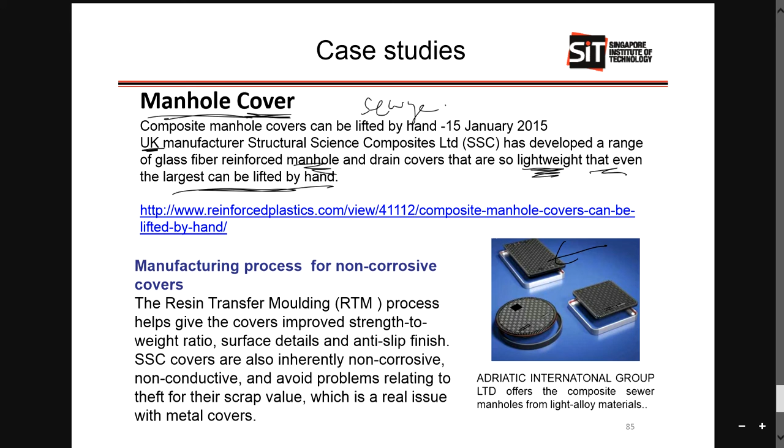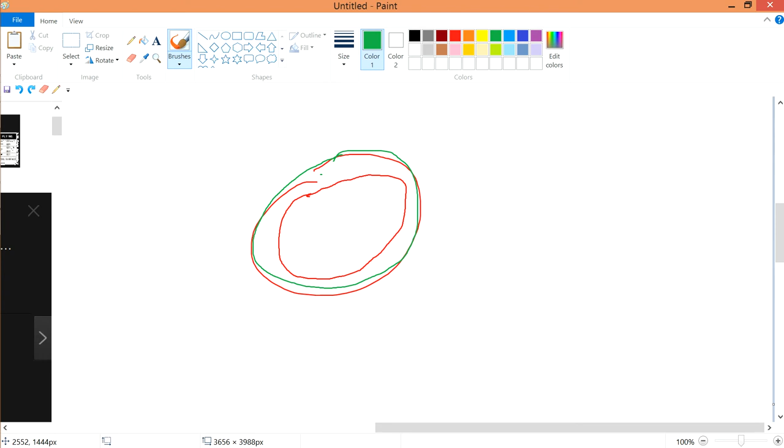Okay, for example, this is the hole. There will definitely be concrete over here, and then you place your manhole cover on top. So when people step onto it, this thing should be able to withstand the load before it breaks. So a certain stiffness must be there.

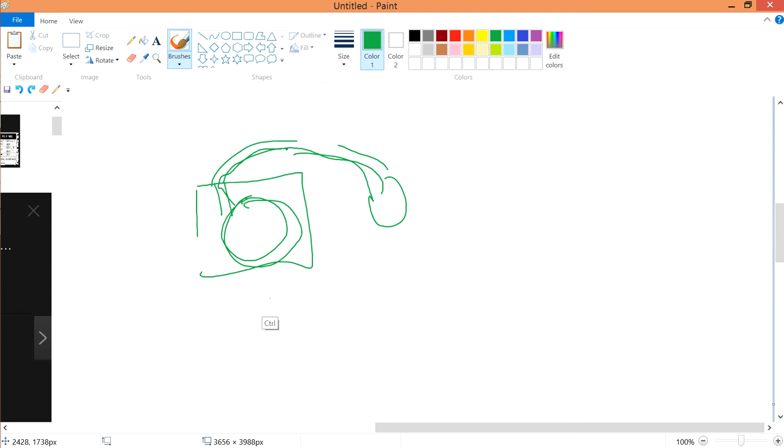And therefore they use the resin transfer molding method. If you don't know, you have a mold over here, and this is the shape. You have a tube, you feed the tube with a certain resin, the resin goes in and fills it up, you cure it for some time at a certain temperature, and then you take it out. You have the shape, and that's all for the resin transfer molding part.

And because it's a composite, you can't scrap it. Normally people will steal the manhole cover and sell it for scrap. Composite has no scrap value, so this is good and prevents the problem. If you have a metal cover, people will always steal it, which is a real issue. So composite solves it, and this market is very big.

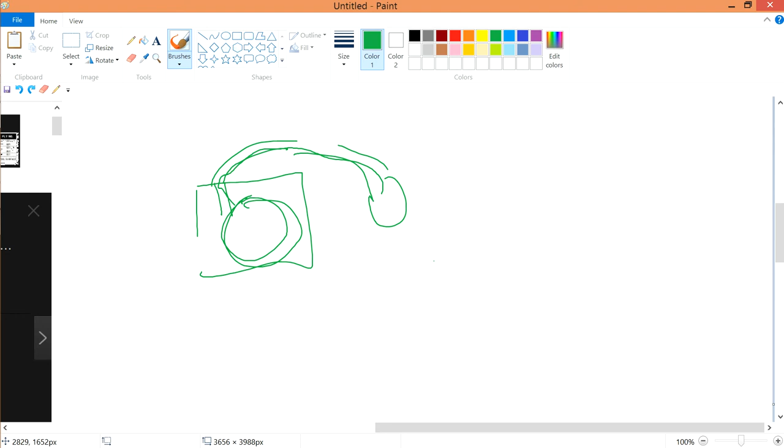In Singapore, trying to steal a metal manhole cover is very tough, so rarely do people want to steal it. But other countries are very sparsely populated, so there will be manholes around the path, and at night there are almost no people, so people would actually steal it. Something like that.

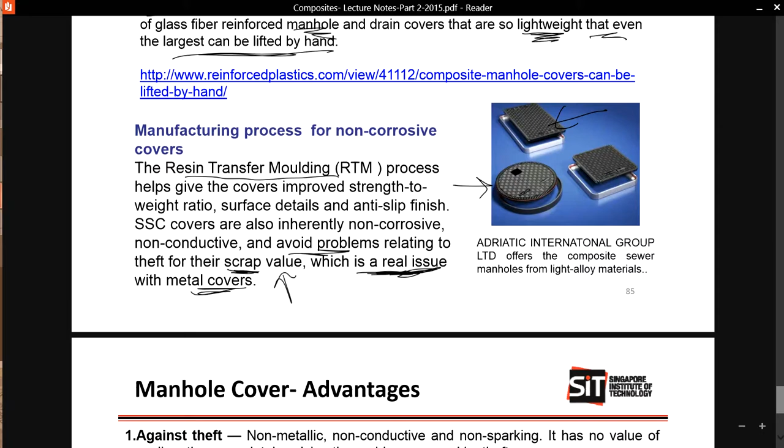And take a look at the advantages. These are all the advantages, you should take note of them. I think you can read it yourself, there's nothing different. And take note of the load capacity, A15 to E600. Let's take a look.

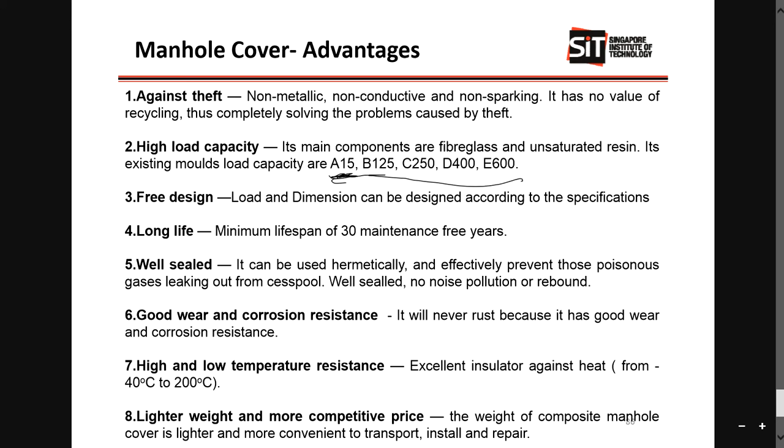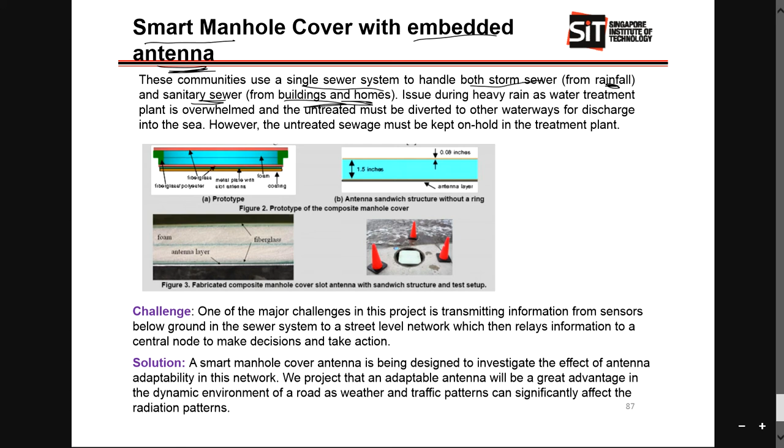Smart manhole with embedded antenna. This is a smart manhole cover, totally different from what we said just now. This one has an embedded antenna. It's for a single sewage system handling both storm sewage, meaning the rainfall, and sanitary sewage, from buildings and homes, like your toilet. They want to investigate the amount of water flowing through it, I think.

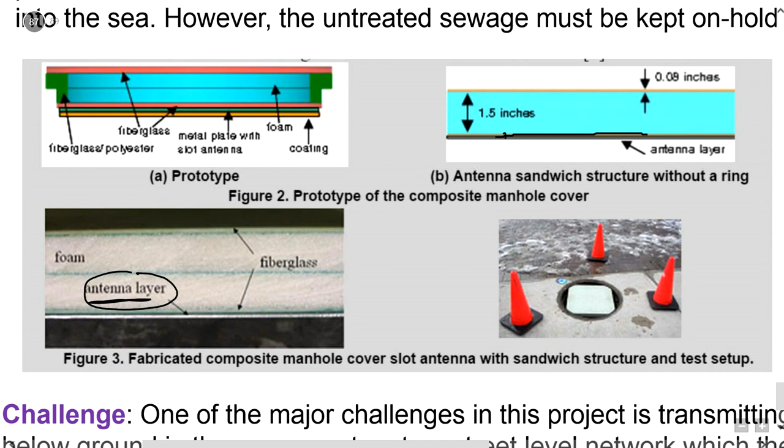So they need an antenna to transmit the signal of how the water flows. So they embedded the antenna layer within the sandwich structure. As you can see, it's over here, a thin layer. This is how they do it, I think. You should check it out if you're free, just read this part.

So this is the challenge: if you have an antenna below the ground, the transmission may be affected. So you want something that is above the ground but protected. This is why they created this thing.

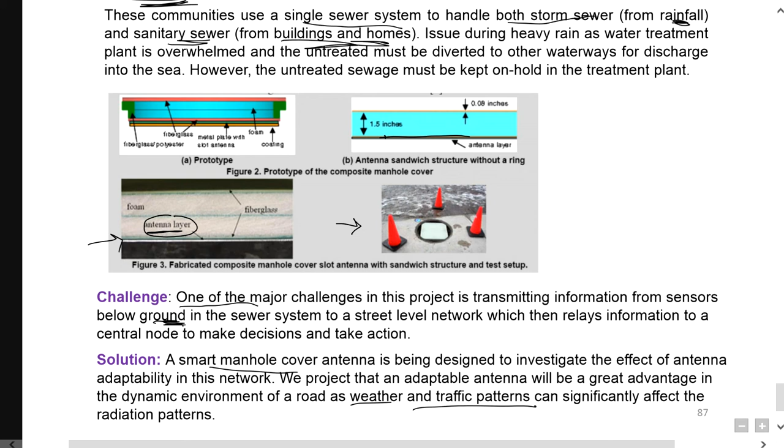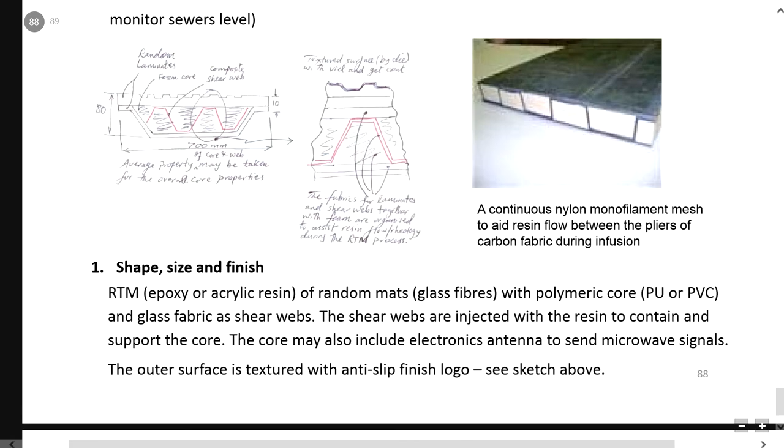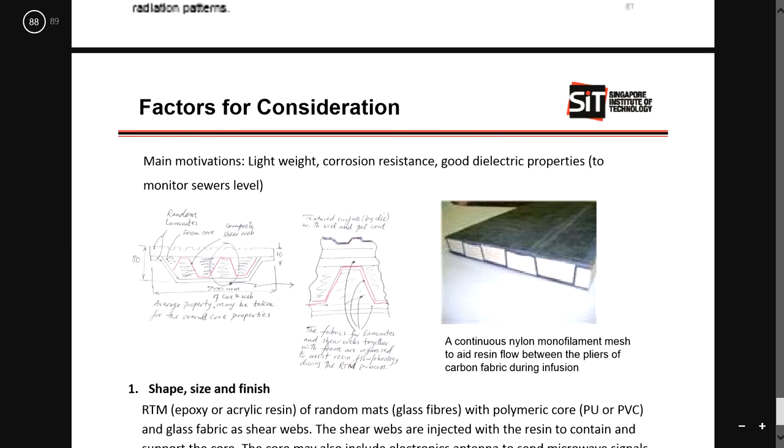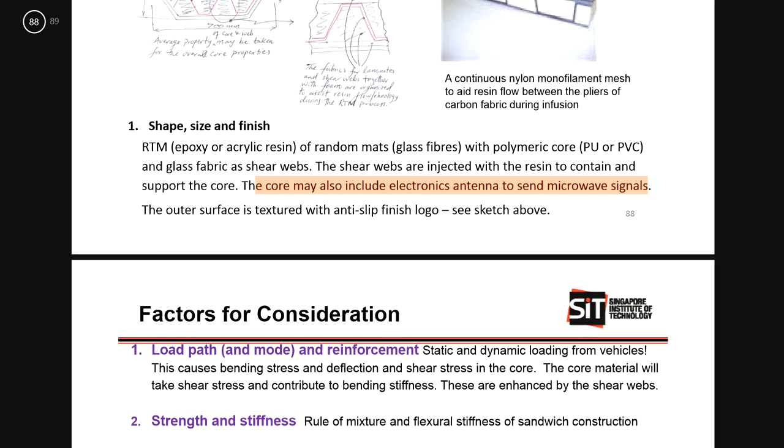For the factors for consideration, if you head all the way back again, in the design consideration, the manhole also has them, which is at this last part. Actually, there are 6 parts. So over here, shape, size and finishing, this is only for the embedded antenna, manhole cover with embedded antenna. So they ensure that the core may also include an electronic antenna to send microwave signals, things like that. And I'll just let you read the things.

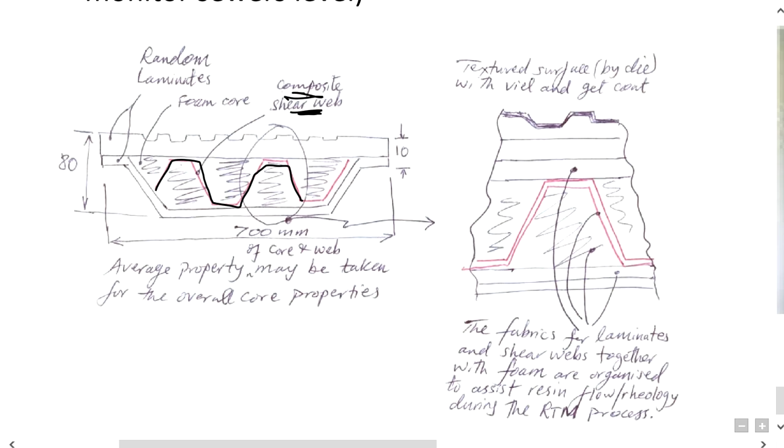So there's a composite shear web, I think it is to prevent shearing from occurring, so it's pretty cool. And average property may be taken. Let's take a look at the composite shear web. Go to this website, airfield models, and when you type shear webs, you can go to this forum and they recommend this link. You click this link, it comes here.

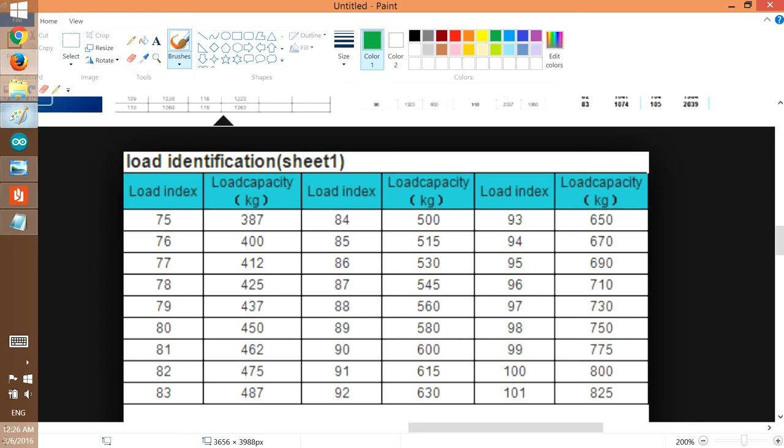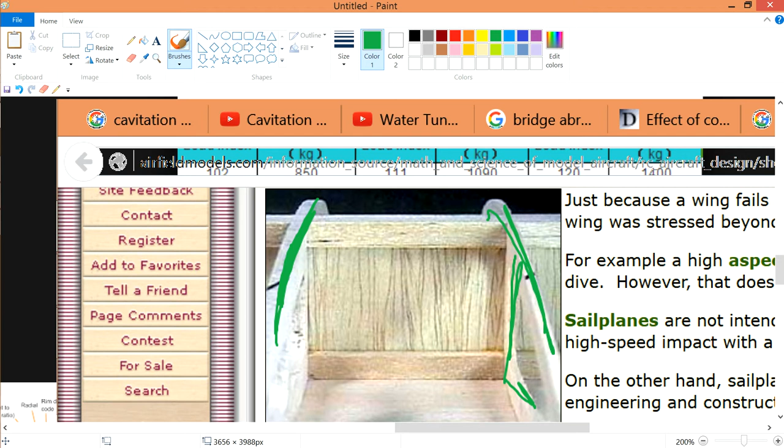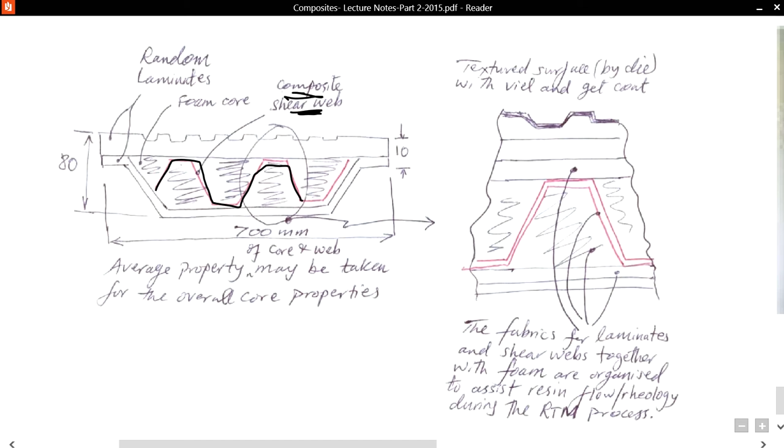So the shear web itself, if you were to just take a look, is this one. I think it should be this thing. This is the shear web, I think. This whole thing is the shear web. Alright, I will believe. Same thing over here, this is the shear web. I may be wrong, for you to think about it. So nothing much. I think you can read that yourself. Nylon, okay, never mind. I think that's all.

So the loading path is over here. The core material will take shear stress and contribute to bending stiffness, using the shear webs. So they will bring the shearing to the bending part, so they'll increase the bending stiffness. They'll convert the shearing part to the bending, because your bending is strong. So therefore, it's okay.

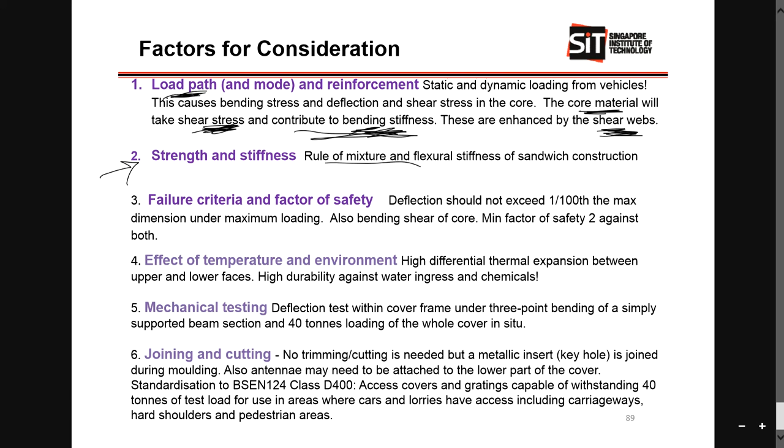Same thing, strength and stiffness. How to determine? You use the same other stuff. Then failure criteria, safety against 2. Differential thermal expansion between upper and lower faces, because your manhole over here is in the outside environment, so it's hot, but below it is quite cold, so there will be a thermal difference between them, so you should take note of that. And also water ingress and chemicals.

Mechanical testing, so they will use a 40-ton loading, I think some car or whatever. I think quite straightforward. Joining and cutting, no trimming is needed, but the metallic insert is joined. I don't know what the hell. Standardization, take note of this in case in the future you may need it. So there will be a standardization, BS EN. I don't know what the hell.

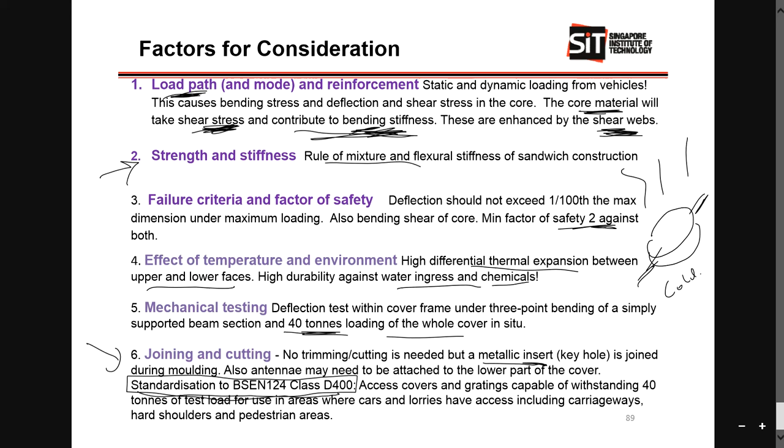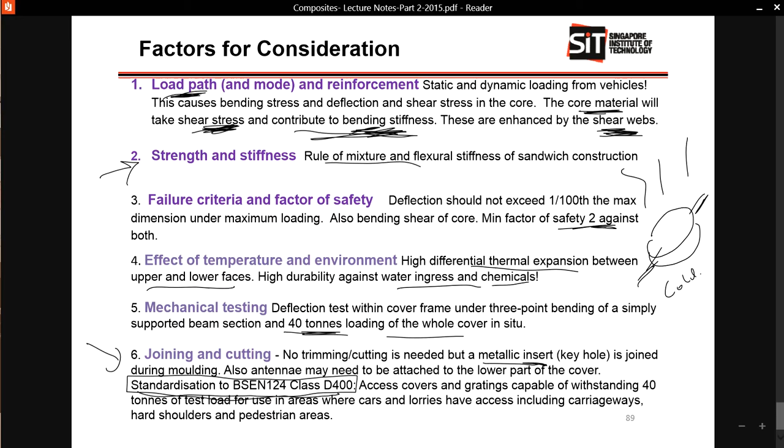Let's take a look. So these are the manhole tops, so-called standardization. It's a standard for British manholes, I think. At least you should know some things. Some engineering things need a standardization to assure your things are good. And I think these are all the things that you should know. I think this is it for manhole. And one key thing was over here. This is the website, you can come here, or also from the slides.

There's a link. So the resin rheology is very fast, it has a very fast cure rate. Rheology is the branch of physics that deals with deformation and flow of matter, so it's more on the fluid flow. So the fluid flow is very fast, and because you are using resin transfer molding, you're going to talk about the resin flowing through, the viscosity, and therefore consistency is very important. High level, as you can see, these are the things. I think this is it for the manhole.

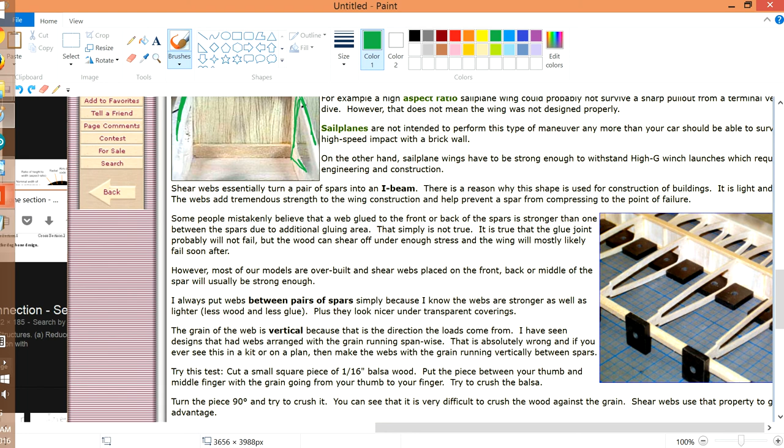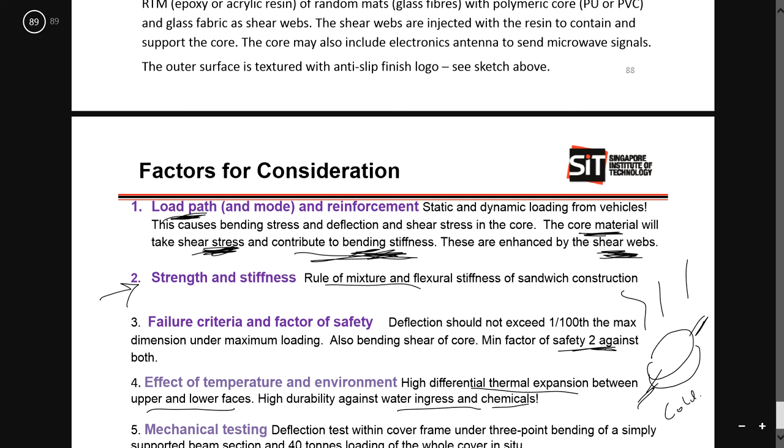And factor of safety is 2, did I say? Yeah, 2, correct. So it's a static short-term loading, because sometimes people step on the lid, sometimes people don't, sometimes a car goes over it, sometimes it doesn't. So I think that's it.